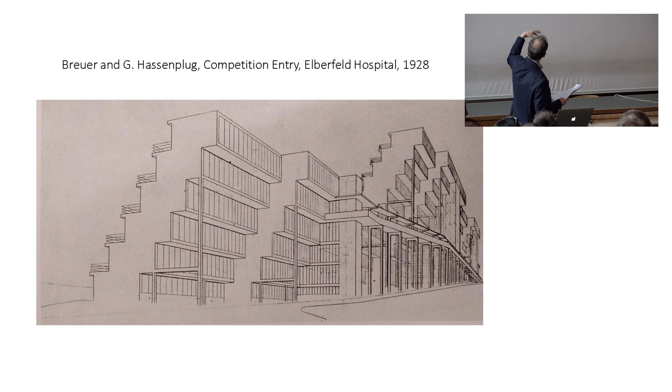After he moved to Berlin in 1928, he set out to translate his aesthetic from furniture to architecture. His realized work was largely confined to interiors and to a radical proposal for an interior of total transformability and openness in the exhibition House of a Sportsman, shown at the Berlin Building Exhibition of 1931. In competition entries for larger public buildings, you see here a proposal for a hospital in Elberfeld on the outskirts of Berlin, this fascination with taking the heaviness of building materials and floating it over open air.

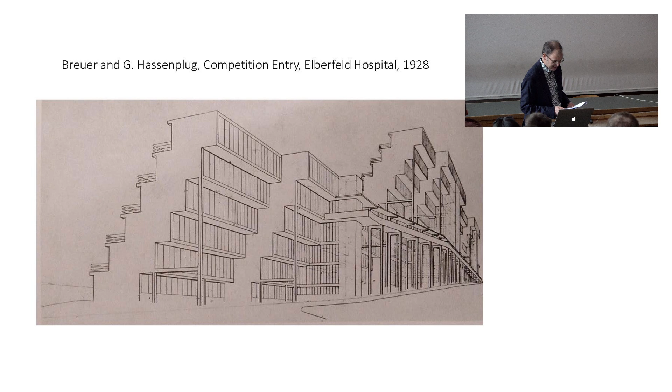This absolute fascination in cantilevering and lightness, and the pursuit of an aesthetic of lightness for modern building, appears perhaps nowhere more than in his unrealized designs for housing for the young masters of the Bauhaus. Gropius had famously built, you can see them today in Dessau, houses for the senior faculty members, but he forgot the assistant professors, as it were, including Marcel Breuer.

So Breuer made a proposal for a prefabricated system of houses for what he called the bambos. As you can see, it's a lightweight, almost ephemeral volumetric box, largely glazed, glass-filled, hovering above the earth—essentially a translation of that chair into architectural terms. This is what he's doing now as a teacher at the Bauhaus, soon to emerge as a designer in his own right.

Even if the tradition of making at the Bauhaus came out of exploring the properties of materials and an innovative training in visual perception in the preliminary course—first developed by Johannes Itten, then retooled by Breuer's fellow Hungarian László Moholy-Nagy—now a third element was announced. I think we have to see Breuer as someone who came through this Bauhaus way of dealing with materials, feeling not only their textural qualities, but how they might function: whether heavy or light, volumetric or enclosed.

But equally, it's too often forgotten that the Bauhaus, as much as it talked about industry, was not really a place of industrial production. Nearby were the Junkers aircraft factory, and Breuer and the others went to visit it. This was a place absolutely obsessed with how to get a heavyweight thing of metal, an airplane, into the air—what we now know, to terrible effect, Junkers was studying. But also at the Junkers aircraft factory there was a great deal of experimentation in aluminum.

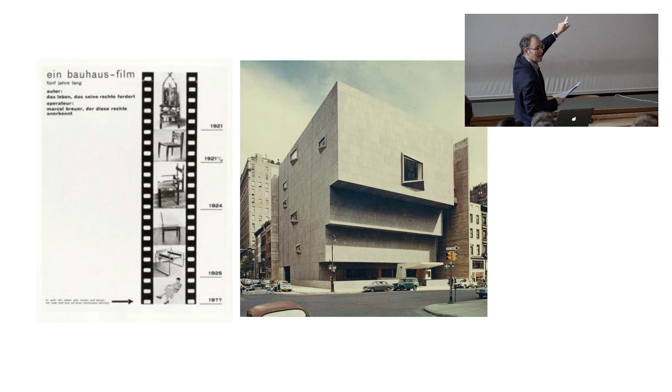So to me, what I want to trace, but you've already got the whole point of the lecture, I want to trace how this exploration in what some have wanted to call Breuer's brutalism is really, to my mind, a continuation of his fascination with the invention of what I'm now calling heavy lightness. So we're moving, in a sense, from light lightness to heavy lightness.

I had an embarrassing moment because I thought I had invented the term heavy lightness, but then I was rereading Shakespeare's Romeo and Juliet, and there's a reference in it to heavy lightness. So this is a love affair between Breuer and lightness, if you will.

So let's go back to retrace a little bit the steps of this. The Whitney Museum, I must say, was described over and over in the press as a kind of fortress for art. So our question is, how did we get from floating on air to a fortress? How can one address this seeming radical reversal of the valence of metaphors, the seeming paradox of a career with a radical change of heart?

I've already told you I don't believe that there is a radical change of heart. How could this architect, who had made the pursuit of lightness both the sine qua non of his personal aspirations as a designer, and in a sense the very nature of modernity, become, in turn, in America, one of the greatest form givers of the aesthetics of weightiness, which we associate with the popularity of poured-in-place and precast concrete, and with international brutalism as it developed in the 1960s and 1970s.

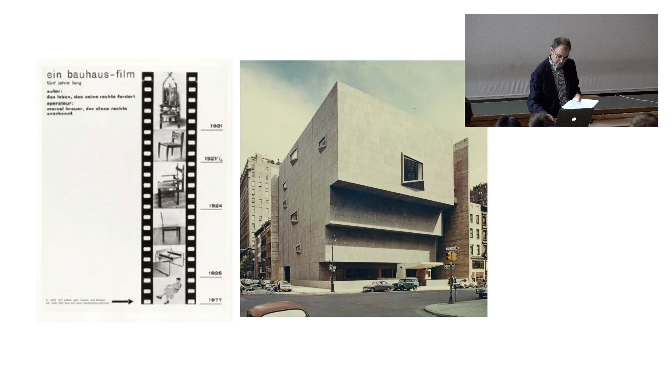It would be as though Mies van der Rohe, famous for his adherence to beinahe nichts, nearly nothing, almost nothing, were to turn to granite cladding for his frame skyscrapers of the 1960s. So let's go back in Breuer's career for a minute. Let's start with the light and see what happens as we move progressively towards the heavy.

Here was a lightweight, volumetric box on a frame of steel and reinforced concrete, raised up off the garden on pilotis above its sloping site in the Villa district of Wiesbaden. We were together yesterday with my new friends from the Hungarian Museum of Architecture in Pécs, and we went to the Villa district, and we saw modernist buildings from just a few years later.

So this kind of transformation of Central European villa districts into these experiments in lightweight international style architecture.

The house, of course, embodied Le Corbusier's 5 points of a new architecture, revealing the impact a short stint in Paris between Breuer's time at the Weimar Bauhaus as a student and his return to Dessau as a teacher had on him, as well as on the Weissenhof-Siedlung in 1927, when both Le Corbusier and Breuer were present on that site.

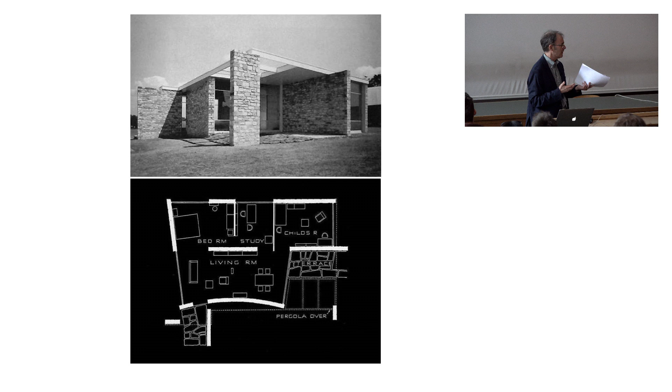And of course, the question of what modern life means is very vexed in the 1930s as the political situation unfolds. Hitler has closed the Bauhaus. He's staged these exhibitions of degenerate art. There's a whole politics of what it means to be modern now in the 1930s, quite different from the 1920s.

And Breuer finally, he's not a person who liked to speak much, gives a speech in 1934 before the Werkbund in Switzerland called Wo stehen wir? Where are we? Where do we stand? Which he had printed in the back of his first monograph in 1962 in the United States. So this is still for him a very important position. And he made it clear there what for him was at stake.

Modern architects have a natural affinity with the authenticity that speaks to the traveler, he says, who finds a native tradition. Quote, places where the daily activity of the population has remained unchanged. It's a very poignant phrase in 1934, where everything is changing.

He explains, even while acknowledging that these types of places are fewer and further between than in the past, that the imitation of such building patterns is not only out of the question, but ethically and politically untenable. And he says, the modern world has no tradition for its 8-hour day, its electric light, its central heating, its water supply, its liners, or for any of its technical methods.

One can roundly damn the whole of our age. One can commiserate with or dissociate oneself from it, or hope to transform the men and women who have lost their mental equilibrium in the vortex of modern life. But I do not believe that to decorate homes with traditional gables and dormers helps these people in the least. On the contrary, this only widens the gulf between appearance and reality and removes them still further from that ideal equilibrium which is or should be the ultimate object of all thought and action.

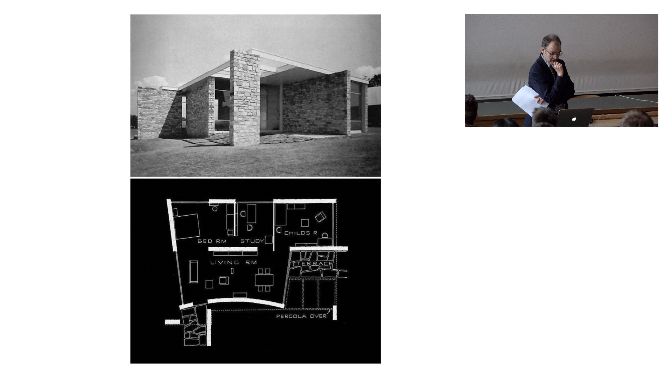We need to find the connection between the realities of modern technological society and these authentic values. So this is the position that he's tracing for himself at that moment. All neo-traditionalisms then for him are firmly rejected.

There, Breuer's interest in developing a dialogue between the modern expression of new materials, such as steel and glass, new techniques such as steel frame construction and cantilevered spaces, and new experiences such as transparency and changing views, with, surprisingly enough, vernacular tradition, notably fieldstone walls, and ultimately even with the experimental adaptations of American wooden or timber construction, notably the timber balloon frame, took on a new intensity.

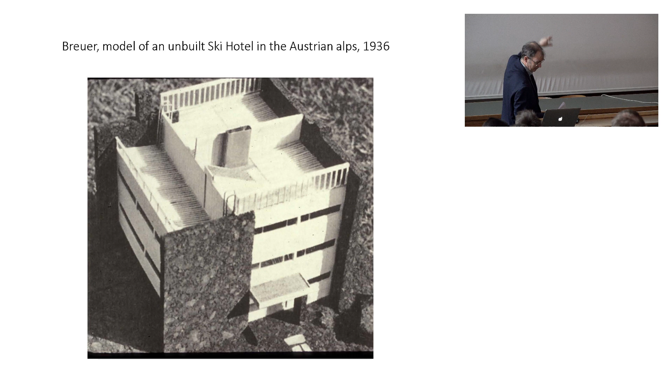So in many ways, Breuer felt that England was not nearly as conducive to his experiments, although during that period he designed a whole series of projects, many of them unbuilt, that put together the technology of steel construction with load-bearing walls. This is an unbuilt project for a ski hotel in the Austrian Alps in 1936. By a year later, that would be an impossibility.

But this experiment continues in his own earliest work in the United States. Scarcely arrived, he is given money by a patron of the School of Architecture at Harvard to build a house for himself, and he builds this house where he lived for about 10 years, in 1938, 1939.

And here you see, as though he's taken the Harnischmacher house from Wiesbaden, these almost weightless white cubic volumes with windows that stretch wall to wall, so that we can see that it is not the wall that is sustaining the building, with a curved fieldstone wall of the type that he could see all over New England.

If any of you have a chance to travel in rural New England, you'll see everywhere piles of stone walls defining fields. These fascinated Breuer and Gropius as the American vernacular tradition, and soon he was taking it over into construction for clients.

This is the Hagerty House, which still stands. It was one of the earliest products of this collaboration between Gropius and Breuer. This is on the seaside, on the ocean front, south of Boston, at a place called Cohasset. You can see the house cantilevers off of its base.

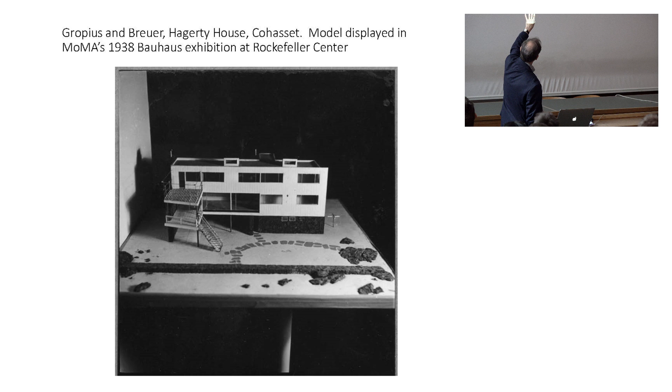Again, one of these porches, like in the house in Wiesbaden, that is incredibly open, but the whole thing set against, as in his own house, you see these stone walls. There's the Cohasset house with its supporting stone walls, playing off against what has happened in these two houses—this is his own, and this the house at Cohasset.

I hope you can make it out. My slides are not as crisp as I would like, but this is a wooden box—a wooden frame inside clad with wooden members.

In traditional American wooden architecture, the wooden members go horizontally across. They're nailed horizontally and they flap over one another. He wants that to be tauter, like a volume, so instead of it being a concrete house like in Wiesbaden or stuccoed, he turns the timber of American construction vertically. So even in the smallest detail, he thinks: what is American tradition?

It's what we call clapboard construction like this. Instead of having it overlap, I'm going to turn it vertically and make it very volumetric, so it's an even more pronounced contrast with the exposed freestanding wall at the end.

This picture is significant for us because this is a model of that same house, which is in the Bauhaus exhibition that he and Gropius and Herbert Bayer stage at the Museum of Modern Art in 1938. This is a very poignant moment. The Bauhaus had been closed five years earlier by Nazi stormtroopers. What did it mean to exhibit the Bauhaus in New York in 1938?

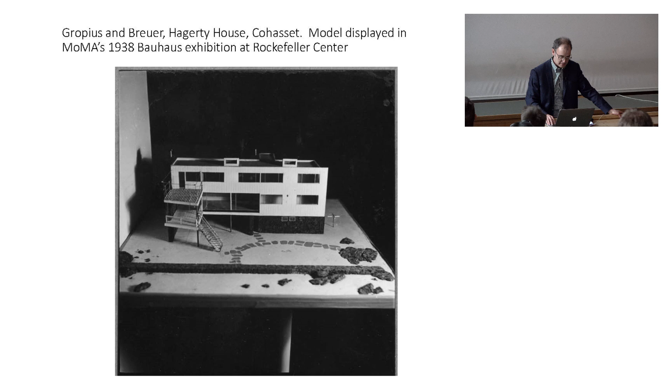But what is this building doing there? This was not built at the Bauhaus. This is announcing the Bauhaus is alive and well in Cambridge, Massachusetts with the emigres and will be continued. In fact, schools are being set up.

Breuer was assembling a museum for the students' materials. It was going to be a kind of display, long gone now. That was one of his assignments.

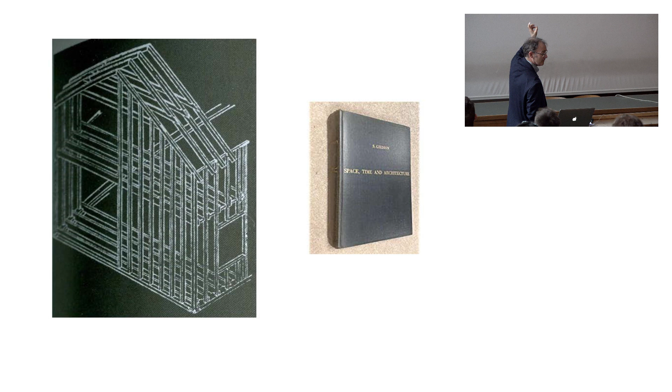At the same time, Siegfried Giedion was giving a lecture series which became the incredibly influential book Space, Time and Architecture, in which he included an entire chapter on the roots of modern expression in American vernacular construction. He celebrates what he calls the anonymous product of the balloon frame. This illustration is from the book, but these were also lectures given before students, including Breuer and Gropius, where Giedion explained that American architecture already had the technological capacity to invent something radically new in timber through the balloon frame.

The balloon frame did two things. First, it standardized the elements of architecture, making it an early form of prefabrication. Second, it allowed the frame of the building to go up completely in a very short period of time before it was enclosed.

Soon after, this house is co-signed by Gropius and Breuer, but I, like many others, believe it was actually designed by Breuer. I think this is his first American masterpiece—a little weekend cottage on a river outside of Boston, where he reinterprets the idea of the balloon frame into a modernist aesthetic.

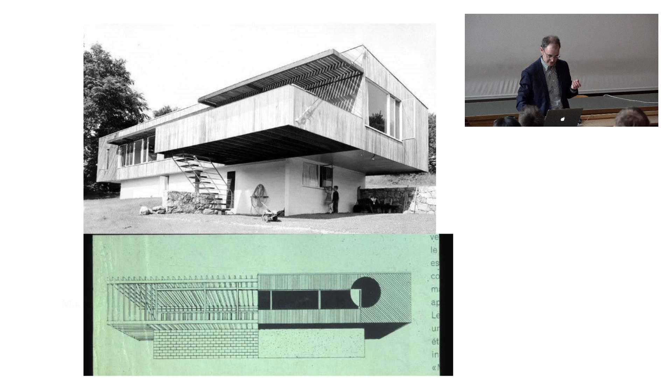His young assistant sent a telegram: it's about to collapse, the thing started to go. So if you go there today, there's a demonstration of how the frame is being transformed. There, Breuer and his young wife Connie on the terrace. I didn't bring the incriminating evidence, but if you go there today, what they had to do at the last minute was build that stone wall up until it hit the terrace and held it in place. So the experiment was taken maybe just a step too far, but Breuer was not giving up.

This is again a kind of question mark: where are we going in the future? He began to think, can I take this and industrialize it? Can I serialize this? Can I make this into something that everybody can have, not only an architect who's starting to have some revenue? Here he was already, before he left Harvard, with the students designing a prefabricated house based on turning American timber construction into a repeatable module.

And I like this model that the students made with him in class, what he called the Plas 2-point house. Plas 2, because it sits on 2 points. The whole house is sitting like this. He thinks, how can I make a prefabricated house that could be anywhere? It could be in the flat of Pest, of Budapest. It could be up on the hills of Buda, anywhere. The problem with a prefabricated house is that it wants a nice flat site. This one can go anywhere.

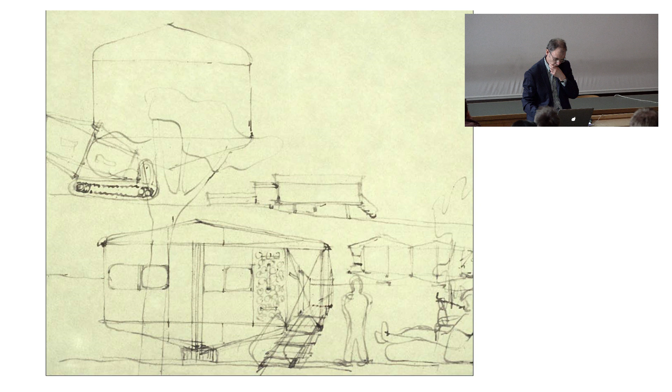But what is the thinking? The thinking is actually looking at airplane wings, and thinking how airplane wings are designed to create an inhabitable space between those two trusses, one reversed from the other, and the whole then will be clad with this system in which he's going to use a brand new plastic product by the Monsanto company to make the plywood even more rigid in its working. Here's one of his drawings. He even imagines that the house might be delivered to its site by a kind of bulldozer. And here it is in the product advertisement by Monsanto.

So how do we get from those experiments to this?

In the early 1950s, Breuer's career took a distinctively different turn, a move not only from New England to New York, as New York was emerging as a kind of world capital, particularly with the construction, during Breuer's very first years in Manhattan right after the war, of the United Nations complex, but also a shift of his architectural office from a small studio concerned largely with individual house clients to a growing partnership of architects working on whole complexes of buildings, campuses really.

Two unexpectedly ambitious commissions came his way in 1952, 1953, which I've already evoked when we saw this contrast: one to build the largest Benedictine abbey in the world, the other to build a second complex of buildings for the United Nations, this time in Paris, UNESCO. These were to catapult Breuer into a whole new mode of practice. Almost overnight he became one of a new type of American architect emerging in the 1950s, a global designer and an architect of institutional identities.

With these commissions, Breuer's relationship to engineering, to materials, and to a new visual balance between heavy and light was catalyzed. As the two projects developed in the early 50s in close juxtaposition, even in tandem, these two idealist and ideologically charged institutions of supranational governance afforded unprecedented opportunities to give form to recent calls for a new monumentality. This is a big theme after the war. A new monumentality would not betray modernism's original fear of empty symbols and of historical rhetoric, even as architects sought to counter a perceived loss of community, a perceived psychological crisis.

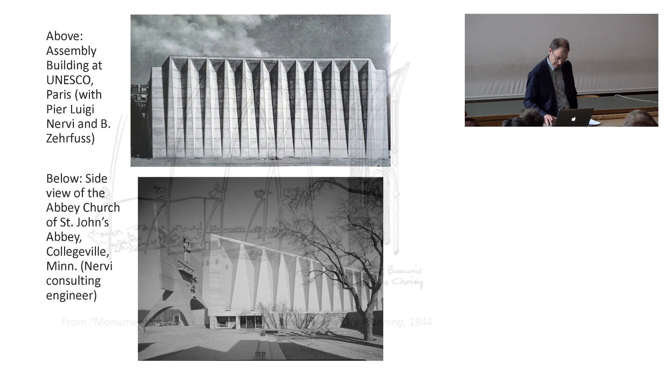So here is the argument about the new monumentality taking place. Breuer had ready answers at hand because of this extraordinary project he designed during his years in Britain, where he imagined an entire new city made out of concrete. There's no commissioner for this—it's purely an experimental project, defining all of the building types and ways you can use concrete.

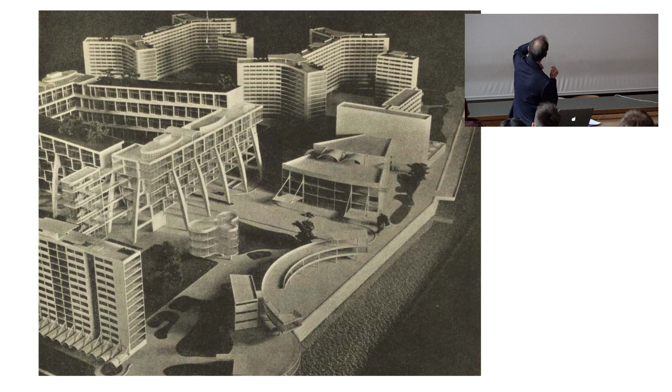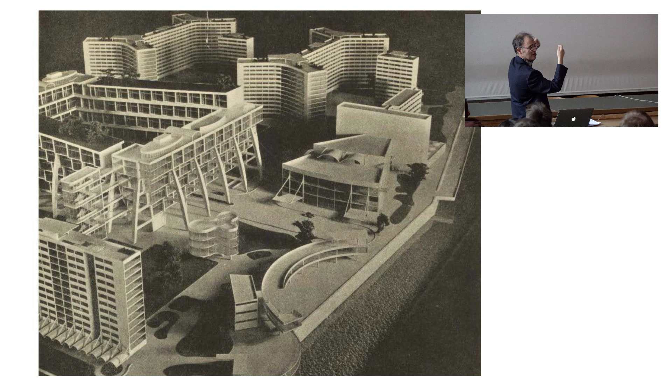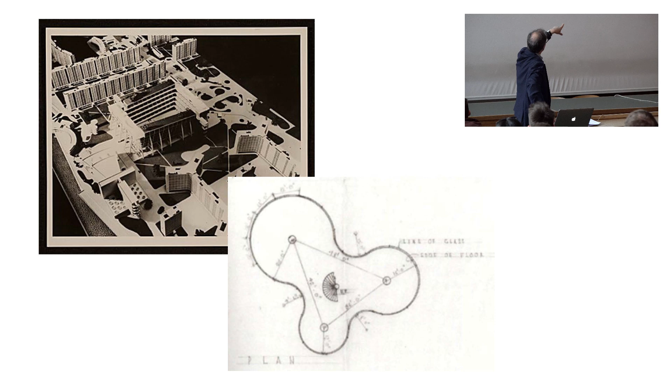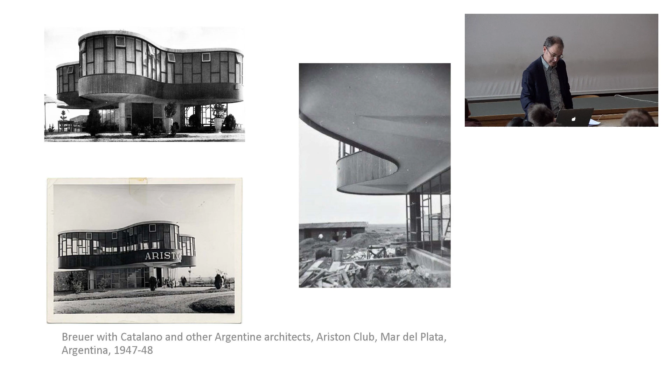It's a really interesting thing to take a book of all of Breuer's projects, take this photograph of the model, and see how almost every one of these imagined buildings he will use at some point, sometimes 20, 30, or more years later. For instance, that squiggly building in the middle he actually realized during his short trip to Argentina, while his house was under construction, as this dance pavilion—now in a state of ruinous disrepair in Argentina.

But even the Y-shaped buildings here are going to go into the solution of the Secretariat at UNESCO. So what I'm going to do now is move rather more quickly through this juxtaposition of UNESCO and the Abbey at Collegeville, to show you how he begins to play with these themes announced here, now finding a form from them while working directly with an engineer.

One of the interesting things in this career after the 1950s is the collaboration with a set of extremely innovative engineers. That's something we began to explore in a book I published a few years ago, in which we also invited an engineer and a historian of engineering to think about this. It's one of the prejudices—I don't know if my architectural history friends agree—that we often have in looking at post-war architecture: not looking at the relationship between the architect and the engineer. Breuer, over and over again, worked with extremely innovative engineers.

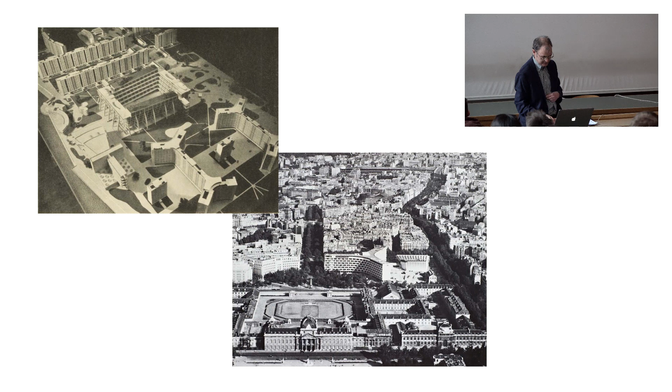In these two projects we'll look at, he worked with the Italian engineer Pierluigi Nervi, but many of his other projects involved, as was often the case during his career in New York, a Hungarian collaborator—the office of Paul Weidlinger, a major structural engineer in New York in the post-war period. That too is a whole interesting theme: the cohesion of Hungarian émigrés in the New York architectural and engineering scene in the 50s, 60s, and into the 70s.

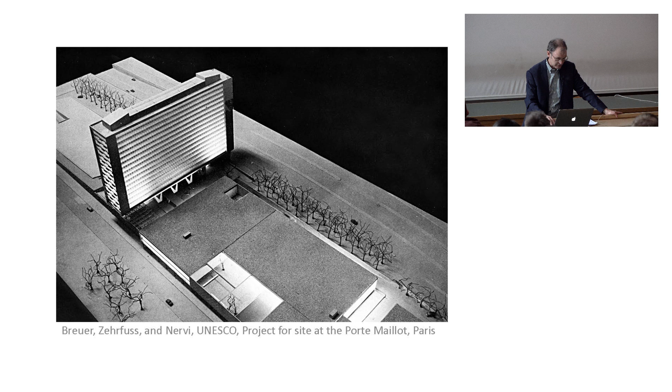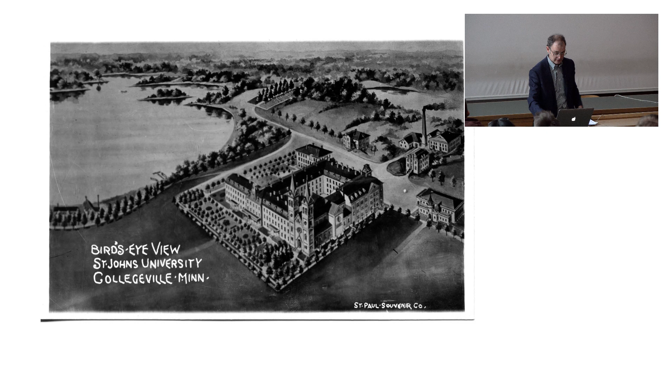At about the same time, Breuer gets a commission which is going to essentially end the commission for the small American house, the work in timber, for a monastery in Collegeville, Minnesota, in the middle of nowhere, on the lakes of Minnesota.

You see a university that had been founded largely by Bavarian monks in the middle of the 19th century, and they didn't want to leave Bavaria behind, so they had a kind of neo-Romanesque vocabulary. This is an extraordinary moment where these Benedictine monks want to not only expand, but to create something new. The Benedictines are exploring architectural modernity.

The monks at Collegeville were the leaders in the liturgical movement that led to Vatican II, and I think ultimately the openness of these monks to rethinking how the Catholic ceremonies took place, Catholic theology, and Breuer came together.

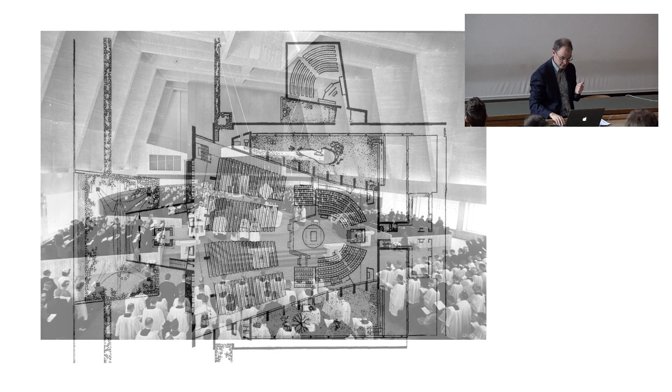So I think you get there that back and forth relationship between the two. And from that, Breuer is going to go on to a whole series of experiments as he essentially completely reinvents his architectural language in America, using reinforced concrete, using engineering calculations, but all of which I believe creates a maintenance of the idea of modern lightness into a new expressive form.

So for years to come, Nervi and Breuer would echo each other, and I just want to read to you the beginning of a moment when Breuer again expresses himself. Really the first lecture he gives since 1934 of any type comes in 1962, just as these buildings are being published. The American magazine Record had admired the structure, if we go back to that.

They said, the Conference Assembly building at UNESCO is an extraordinary, imposing structure which looms larger than its size would suggest. And Breuer proclaims in Architectural Record that he considers this particular structure one of the masterpieces of our concrete age. The corrugated front wall and roof give a plastic definition of space to the Assembly Hall, which is entirely new in concept, completely correct structurally, and extremely exciting visually.

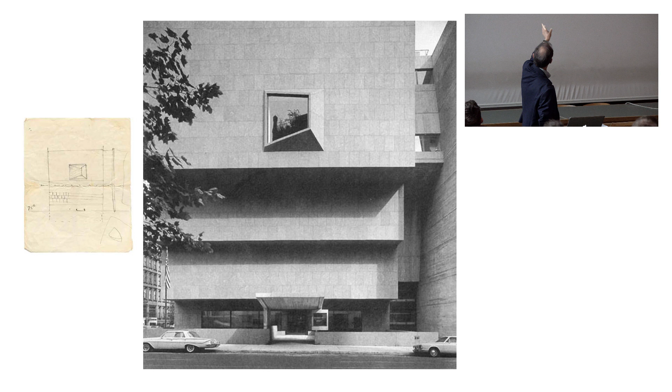We're told that there's a big gallery space by that almost cyclopean window appearing there. There's where they had been in their modernist building, which was demolished some years later. They move uptown. There's Breuer's first sketch on the back of a letter he happened to have sitting on his desk at home, came back to the assistant and said, this is what we're going to build.

We're going to set it off from the buildings on either side. We're going to create an exposed concrete wall you see on the very right-hand edge of the slide. We're almost going to create a frame for our building. We'll create the site, and then we'll float this building above it.

Why do I say floated? It's very hard to photograph, but I think you can begin to make out that deep underneath, the lowest floor is not clad in granite, but is completely glazed, floor to ceiling glazed. These three inverted ziggurats hover above a glass wall.

This wonderful photograph by the American architectural photographer—I think he was also of Hungarian origins—Ezra Stoller.

Fascination at this period with the idea of the fundamental, the monumental—Giedion is now talking about the beginnings of architecture. Look at this trip that is going to take us from the sidewalk across this very expressive bridge, across a moat, and then through a glass wall.

Then we can even look back through that glass wall, which actually extends below the level of the street, back out to the street as though the city is being put on display, into this extraordinary lobby with its battalion grid of lighting that Breuer himself designed for that.

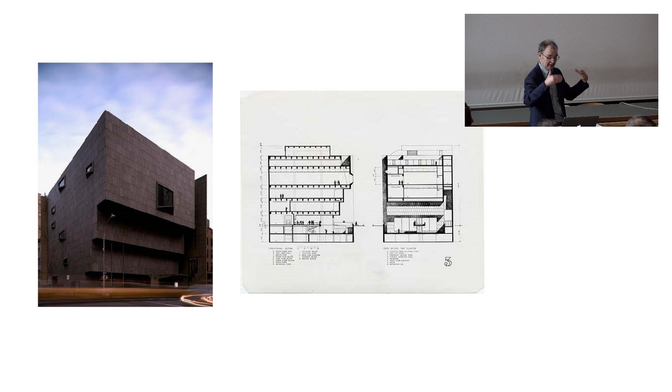There you see the loft-like spaces completely uninterrupted on any floor by walls, every floor getting larger as you go up, taller as you go up to the top floor. We're very interested in the left-hand section to the protruding window, which we see in this overexposed photograph.

Let's go in at night, really dramatic. And there I think you can see, particularly at night when the lights are on, this effect of heavy lightness. Originally, Breuer had thought that that parapet wall itself would be glazed, but in the end it was built of solid granite.

One of the most beautiful experiences you can take—I sent my friend Tas here, I said, you've got to go see the staircase. You have to go through the building by the stair.

So I hope I've convinced you that we can trace that experiment from trying to float on air to the way he has actually floated an extraordinarily complicated building for a museum of art above the sidewalk on East 75th Street in Manhattan. Also, I suppose, the journey of an incredibly gifted and experimental Hungarian from Pécs via Weimar, Dessau, many other places, a brief visit back to Budapest, to become one of the leading world architects by the 1960s and 1970s in New York, looking very casual on that rather heavy chair, not of his own design.